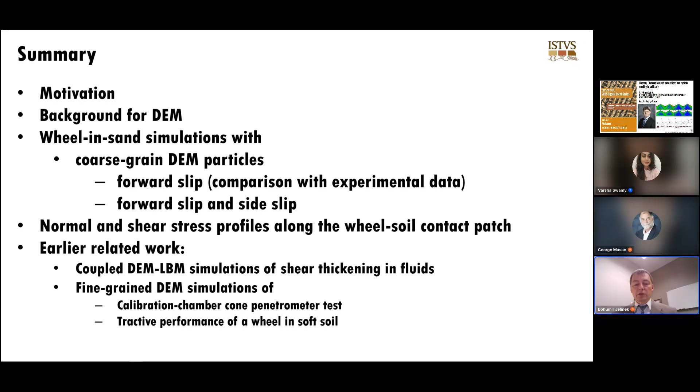Accurately predicting wheel performance in granular media is essential for evaluating off-road mobility in agriculture, construction, space exploration, and defense applications. Empirical relationships require resource-demanding experiments, and their validity is limited to the slip and speed ranges at which the measurement was performed. Finite element models have a hard time dealing with large discontinuous deformation of soil, especially under high slips and aggressive maneuvering. The discrete element method, on the other side, aims to model wheel-soil interactions with higher fidelity.

However, for perfect physical representation, tracking every particle in fine-grained soil is computationally demanding. Therefore, DEM needs coarse-grained models. Stress profiles at the wheel-soil interface are sufficient to determine soil reaction to the wheel load. Therefore, the numerical representation is examined here.

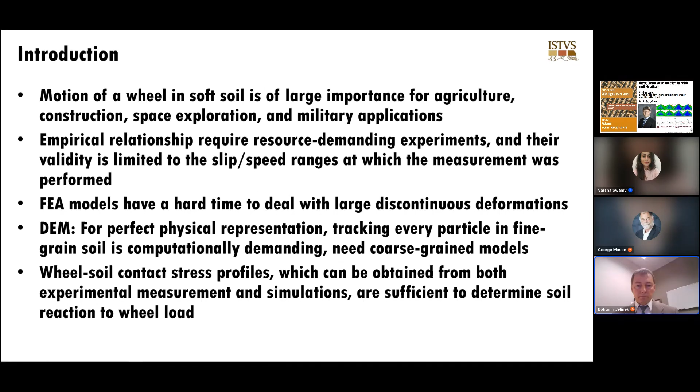In our recent coarse-grained DEM studies, we applied Hertz-Mindlin and Hertz-Mindlin with JKR models to represent DEM contact physics. Hertz-Mindlin is the default model used in Altair's EDEM software package due to its accurate and efficient force calculation. Note that Altair was recently purchased by Siemens.

In the contact model, the normal force is a function of normal overlap. E star is the equivalent Young's modulus, adjusted according to Poisson ratio of the materials in contact. R star is equivalent radius. Additionally, there is a damping force, FND, which is proportional to relative normal velocity. E is a coefficient of restitution. Beta will be used on the next page, and Hertz-Mindlin JKR model denotes a Hertz-Mindlin model with non-zero Johnson-Kendall-Roberts cohesion coefficient, which is further described in EDEM documentation.

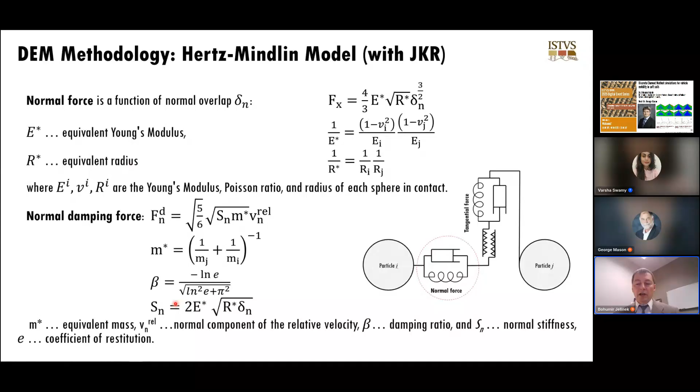The tangential force depends on the tangential stiffness and overlap, where G star is the equivalent shear modulus. Additionally, there is a tangential damping force proportional to relative tangential velocity, which is limited by Coulomb static friction.

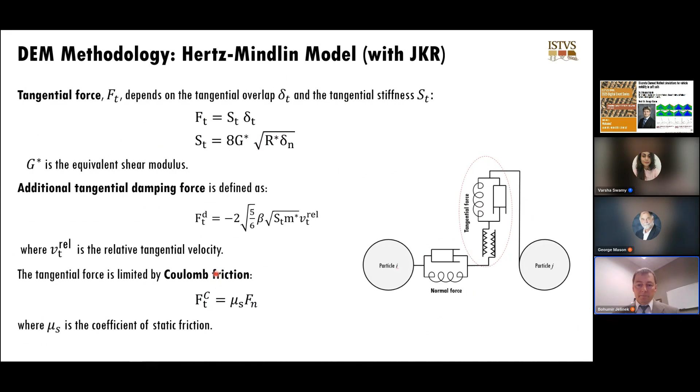The experimental reference for the present DEM simulations was a study titled Experimental Analysis of Tread Pattern Effects on Tire Tractive Performance on Sand, using an indoor traction measurement system with a forced slip mechanism, published by Shinone et al. in 2010, partly presented at the 16th International Conference of ISTVS in Turin in 2008.

Their study shows tread pattern effects on drawbar pull, gross tractive effort, running resistance, and sinkage. We compare with their smooth wheel results.

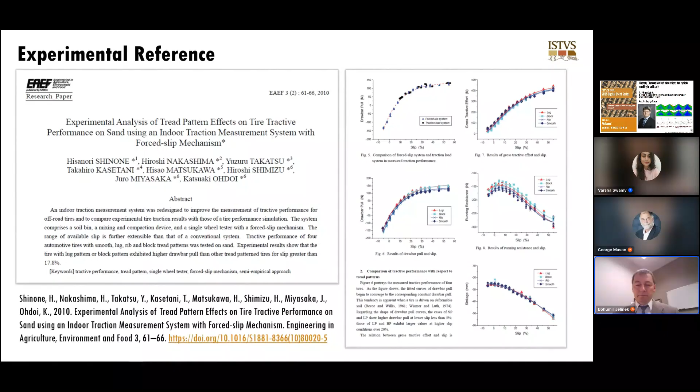The table shows the dimensions of the wheel and the particle bed. The figure on the left illustrates the triangular facets forming the smooth surface of the wheel, which has a diameter of 535 millimeters and a width of 170 millimeters. The figure on the bottom right shows facets for the particle bed, which was 3 meters long, half a meter wide, and 60 centimeters deep. 3 yellow spheres show a single DEM particle.

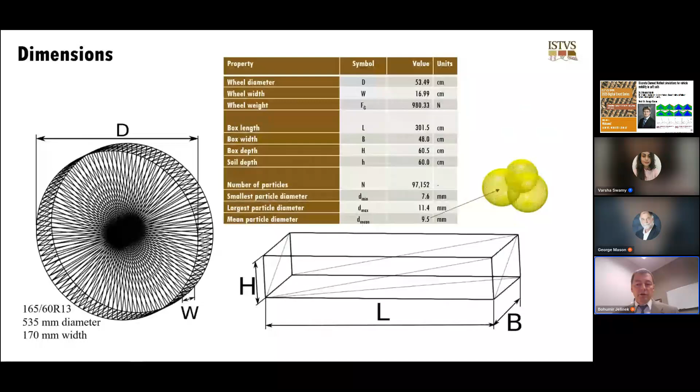A particle bed to simulate wheel-soil interactions was generated using the particle factory functionality of Altair's EDEM software. The particle bed was assembled from 5 identical material blocks, repeated along the longitudinal direction. To lower the simulation time needed to populate the bed with particles, only the particles in a single block were settled under periodic boundary conditions.

GEMM stands for Generic EDEM Material Model database, which is distributed along with Altair HyperWorks EDEM Discrete Element Method software package. The materials examined in the present work were selected using the Material Wizard by answering 3 questions.

First, the small application scale was chosen. It selects the smallest particle size available in the GEMM database, giving a mean particle diameter of 25 millimeters along the particle's widest dimension. Therefore, we are using a much larger mean particle size than dry sand to reduce the computational cost of the model. The 25 millimeter mean particle size is 5 times larger than the upper boundary for the particle size of coarse sand, which is defined as 4.75 millimeters by the cement concrete website.

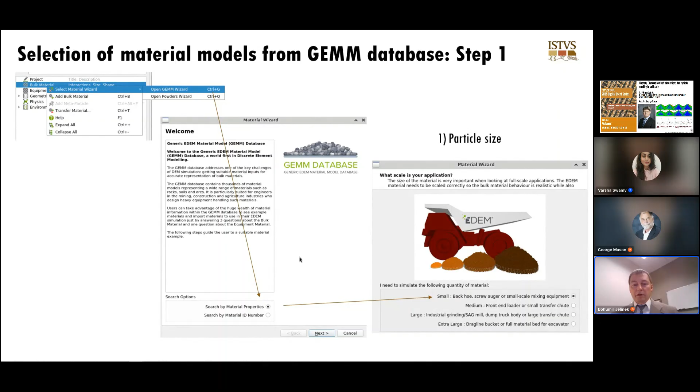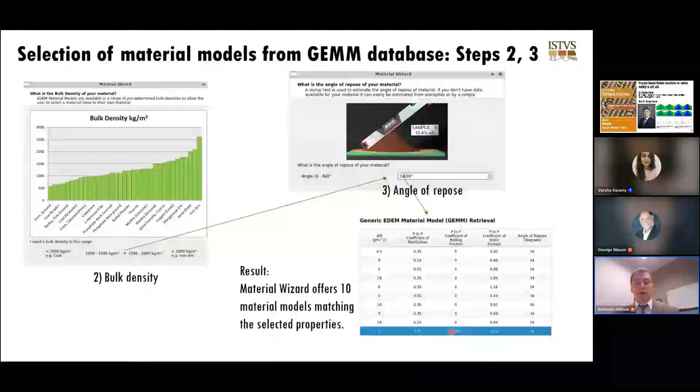The full list of DEM parameters for these 10 materials is shown next. Here, P indicates particle-only properties, PP indicates particle-particle interactions, and PG indicates particle-geometry interactions. The particle bed, meaning particle bed walls, and the wheel are considered geometries. There is a total of 10 material parameters.

4 of them vary among the selected materials. Those 4 are coefficient of restitution, coefficient of static friction, coefficient of rolling friction, which is non-zero only for material number 1636, and JKR surface energy. Non-zero JKR is used to represent cohesive materials.

Next, we describe the DEM simulation procedure. With a load of 980 newtons, corresponding to the load from the experimental reference, the wheel was placed minus 1.3 meters away from the center of the particle bed. By coupling a rigid wheel motion solver to EDEM, the wheel moved at a constant circumferential velocity of 97.6 millimeters per second to the final position of 1.3 meters.

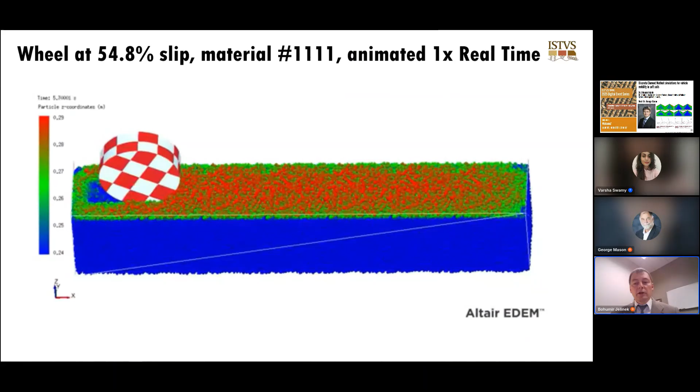This animation shows the wheel motion at 54.8% slip in material number 1111. 1 times real time means that both the animation and the actual wheel motion completed within approximately 58 seconds. The range between the blue and red boundaries is about 5 centimeters, corresponding to the sinkage or rut depth of approximately 5 centimeters.

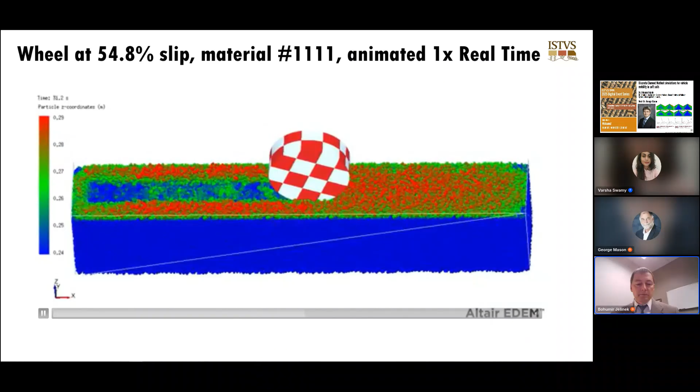What are the properties that are of interest from DEM simulations? First, the slip is defined as a ratio of axis rotation over overall rotation. This slip is either forced or is calculated from the simulation, depending on whether we are doing forced slip simulations or towed condition or self-propelled condition for the wheel.

Drawbar pull force, which is a horizontal force available to pull external load, is defined here. Then there is gross tractive effort, which is torque exerted by particles on the wheel divided by wheel radius. And there is motion resistance, which is the difference between these two.

The averages of these properties are calculated starting after the wheel and soil reach the steady state. The applied wheel slip ranged from minus 5.9% to 54.8% in both experiments and DEM simulations. Time evolution of sinkage, net traction, and gross traction are calculated and recorded at each time step.

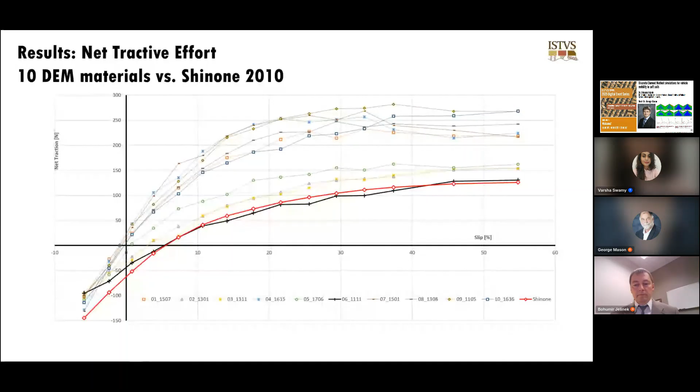The match is excellent for positive slips and slightly worse for negative slips. The gross tractive effort from the GEMM material number 1111, black, matched the measurement, which is shown in red, only for large positive slips. The best match to the measurement of the gross tractive effort was achieved by the material number 1311, which is the thick yellow curve.

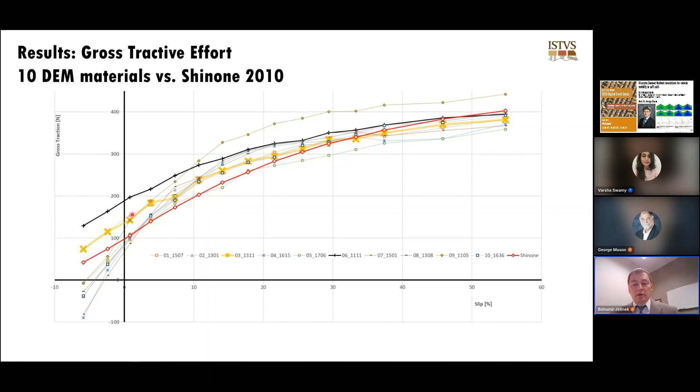Note that the results from material 1301, which is shown by the gray curve with triangles, are always very close to the results from the material 1311. These two DE materials differ only in the coefficient of restitution.

The best match to the sinkage measurement, shown in red, was achieved by the material number 1311, which is the thick yellow curve. Again, the yellow curve is very close to the gray curve. The next best match to the sinkage measurement was the thick black curve from the DE material number 1111.

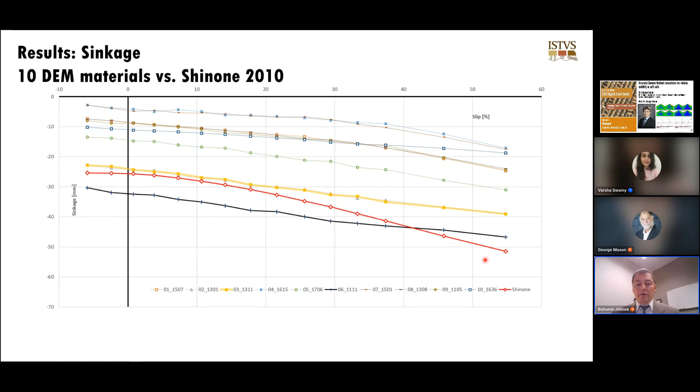This table shows R-square values, the coefficient of determination between the 10 DE materials and experiment. The values of R-square close to 1 means the match is closer. The best matches are shown in green.

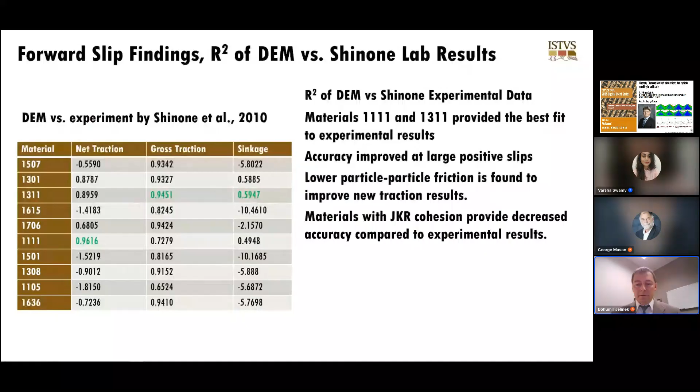The material 1311 matched the sinkage better than the material 1111 at lower slips. However, the material 1111 predicts sinkage more accurately at higher slips, very high positive slips.

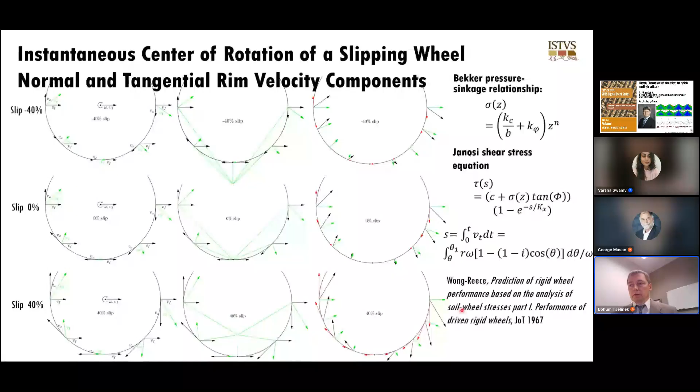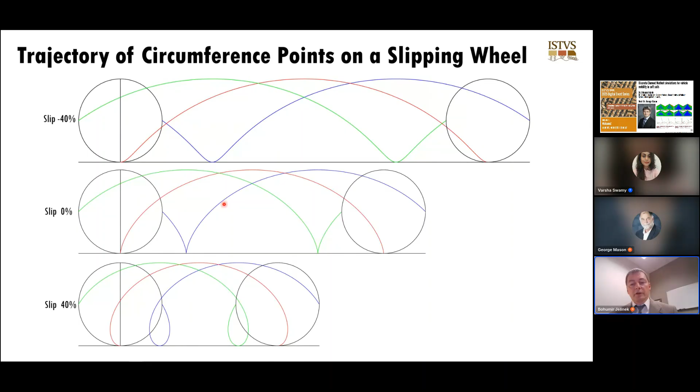In all the plots shown in this presentation, the wheel moves from left to right. Prescribed slip conditions are achieved by enforcing forward velocity and keeping the circumferential velocity of the wheel equal to 97.6 millimeters per second.

With prescribed slip, the wheel is only allowed to move freely in the vertical z direction. The towed condition is achieved by forcing Vx, the forward component of velocity, to the value of Vc, circumferential velocity, and by allowing one extra degree of freedom, free angular velocity omega y.

That means the wheel is towed with a speed of Vx equal to Vc. The self-propelling condition is achieved by prescribing circumferential velocity of 97.6 millimeters per second, and by allowing another extra degree of freedom, which is free horizontal velocity Vx. The slip can be calculated as an average over the steady state of the wheel-soil system.

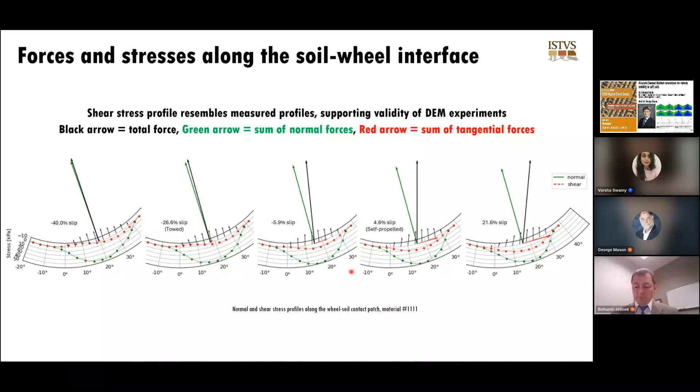Phi1 and Phi2 are the angles at which the wheel enters and exits the soil. The squared tilted sine approximation offers an alternative to connected halves of Gaussian distribution, used by Hiroko and Ishigami in the Journal of Terramechanics 2020. The shear stress profiles in the present plots resemble those measured by Hiroko and Ishigami.

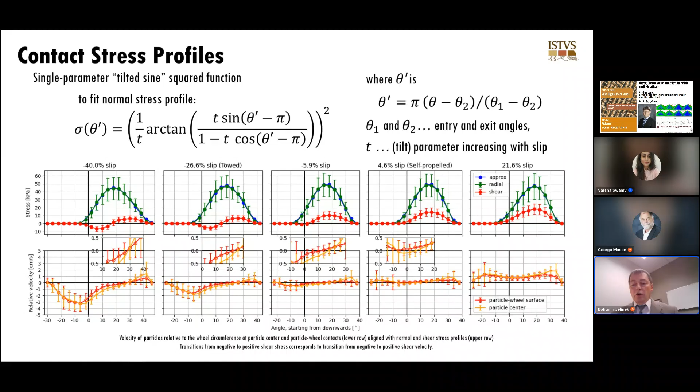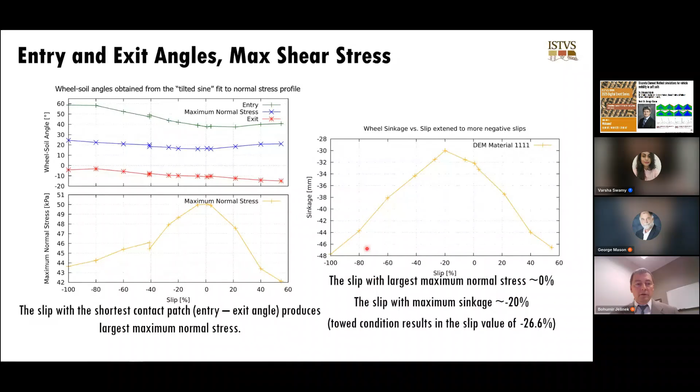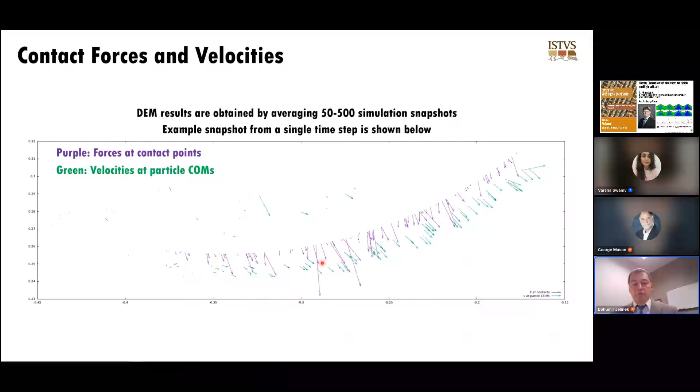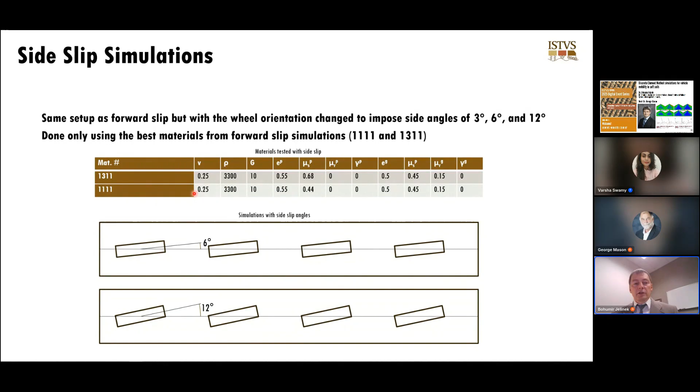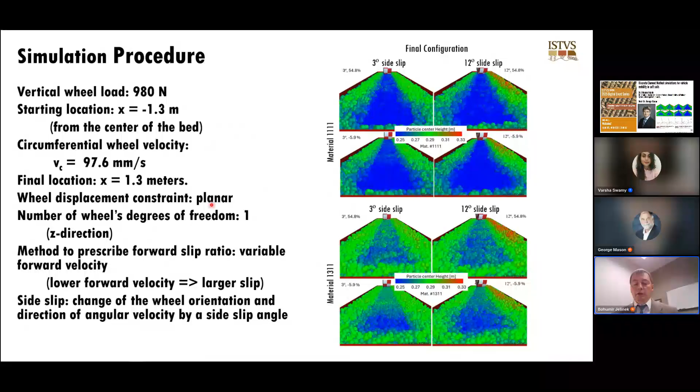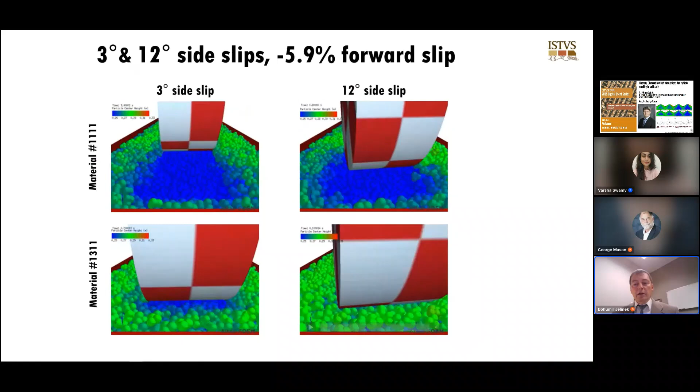Side slip simulations are similar to forward slip simulations, except that side slip is introduced by changing the wheel orientation. The angular velocity orientation was also changed in accord with the wheel orientation. These animations are also displayed at 1x real time, meaning both animation and measurement take about 25 seconds. The range between the blue and red colors, corresponding to 25 and 33 centimeters, is about 8 centimeters, resulting in a sinkage or rut depth of about 8 centimeters.

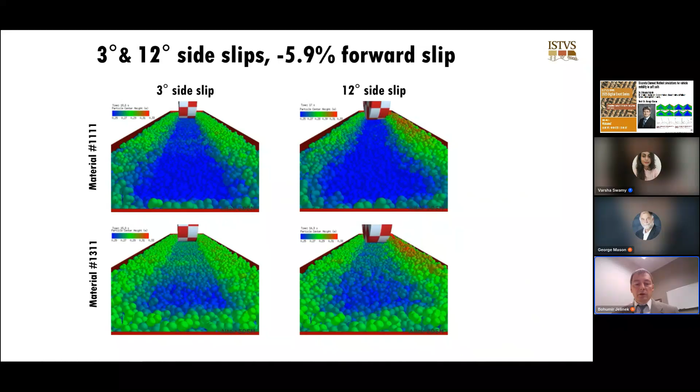Fx is the forward component of the resulting soil-wheel force, meaning pointing along the box longitudinal direction. The forward component of the drawbar pull, Fx, decreases with increasing side slip. Material 1111, with static friction lower than material 1311, produces less forward pull and more sinkage at each side slip.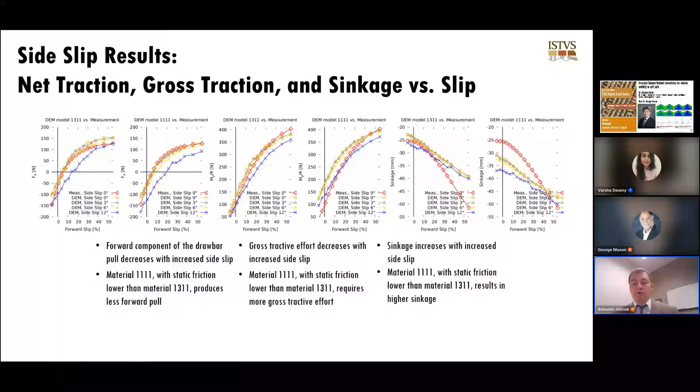The gross tractive effort, My/R, is lower for the lower friction material 1111, pointing out even higher losses when the wheel operates with higher sinkage. The most significant change in all three variables—forward pull, tractive effort, and sinkage—is seen when the side slip changes from 6 to 12 degrees, that is, between the yellow and blue lines.

These plots compare lateral force, shown as Fy, overturning moment, shown as Mx over r, and self-aligning moment, shown as Mz over r, between the two materials. The side slip force Fy increases with the side slip angle as expected. The same is true for the magnitude of the overturning torque Mx and the self-aligning moment Mz, with the self-aligning moment having much lower value than the overturning torque. A significant change is seen in all three variables even when side slip changes from 0 to 3 degrees.

In conclusion, the DEM study enabled detailed analysis of sinkage, traction forces, and lateral loads, revealing trends consistent with experimental data. By illustrating DEM strengths and limitations in capturing tire-soil interactions, this work aims to support its use as a powerful tool for advancing vehicle design and simulations.

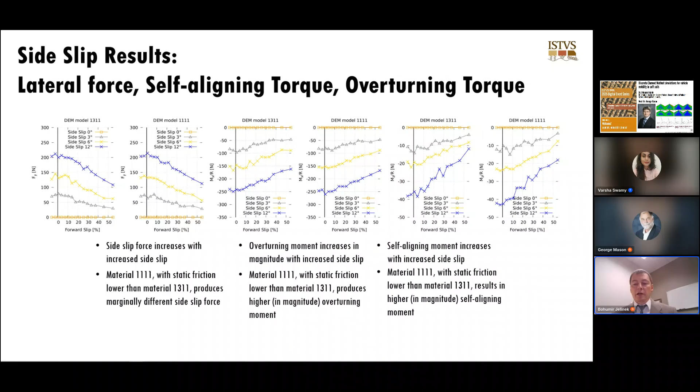Now I will briefly present our earlier discrete element method related work.

These are snapshots from coupled DEM lattice-Boltzmann simulations of particle suspensions in fluids. The top left animation is from 2D simulations of the drafting-kissing-tumbling phenomena, also showing fluid flow patterns. The animation in the center left shows fluid flow patterns and the forces exerted by fluid on particles. The snapshots on the bottom left show particle suspension in fluid settling under gravity.

The right side plot shows the work by Daniel Johnson, published in the Journal of Rheology in 2017, simulating shear thickening of particle suspension in fluid, reproducing experimental results for a parallel plate rheometer.

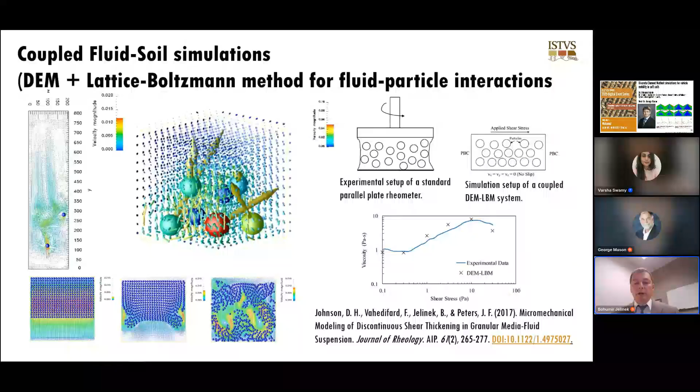These figures show results from a fine-grained DEM study of mobility cone penetrometer performed at the Center for Advanced Vehicular Systems, published in 2019 in the ASCE Journal of Geotechnical and Geoenvironmental Engineering. Close to realistic simulations were produced, including effects of stress field and soil density.

The effect of confining pressure was tested by applying a vertical surcharge load at the top of the specimen.

DEM simulations allow calculation of the stress in soil based on interparticle and particle geometry contact forces. The animation on the right shows the time evolution of radial stress during a calibration chamber cone penetrometer test. Snapshots in the upper right show the stress ellipsoid in the RZ plane, indicating both principal stress ratio and principal axis rotation.

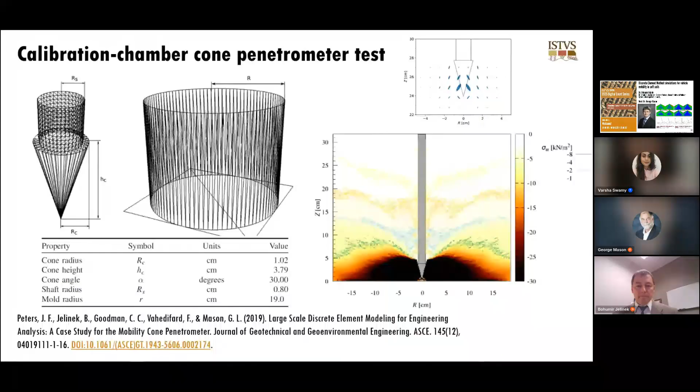The equation on the left shows how the stress is calculated using DEM contact forces. The plots in the upper row show laterally averaged contours of vertical stress under the wheel. The plots in the lower row show laterally averaged contours of shear stress.

The braked -20% slip condition is shown in the first column, the towed condition in the second column, and the powered 20% slip condition in the right column. The plot in the lower row shows a familiar butterfly pattern of the shear stress.

These calculations are results of a fine-grained DEM study of tractive performance of a wheel in soft soil that was presented at the 2021 ISTVS conference.

The upper figure shows lateral variation of vertical stress under the wheel in braked -20% slip, towed, and powered 20% slip conditions, in kilopascals. Front view of the wheel is shown. These values are from a lateral section passing through the wheel axis of rotation, inclined 10 degrees forward from the downward direction.

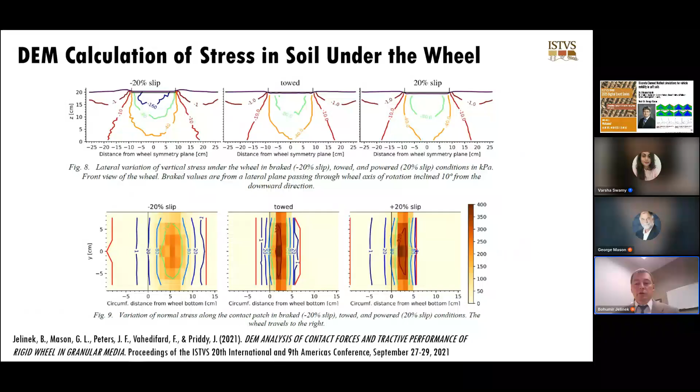The lower figure shows variation of normal stress along the contact patch in braked minus 20% slip, towed, and powered 20% slip conditions. The wheel travels in the left to right direction. An increase in the maximum value of normal stress for the narrow contact patch was observed, similarly to what was seen earlier. The contact patch length tends to increase for negative slips, as indicated in the earlier plots as well.

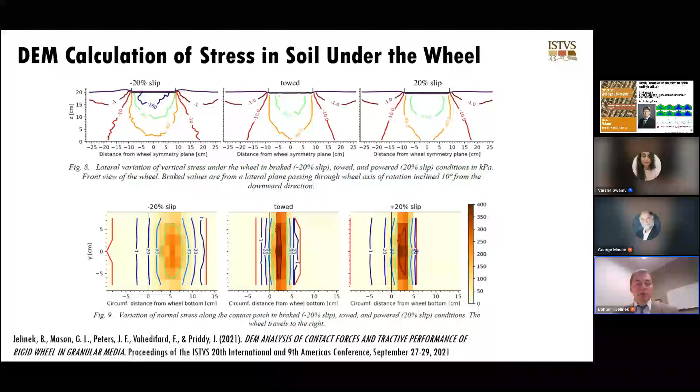In the recent study, we examined tractive performance from 10 materials from Altair's generic EDEM material model database, matching macroscopic properties of dry sand. GEMM material number 1111 provided the best agreement with laboratory measurements reported by Shinone et al. 2010. Net traction was the most accurate model, except that slightly lower values occurred at negative slips.

Sinkage was overestimated by up to 25% for slips lower than 40%, and underestimated by up to 10% for slips higher than 40%. The gross traction agrees well with experimental results for slips larger than 40%, while at lower positive and negative slips, the gross traction is overestimated by up to 200% at low slips of minus 5.9%.

Thank you for your attention.

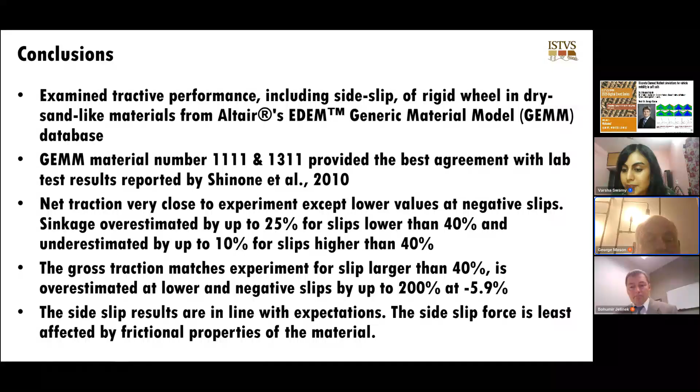Very good question. So there is really a lot of noise in this data, and that is mainly due to particles being large and contact appearing quite suddenly, disturbing the wheel motion.

Now, all that we were doing is averaging. The measurement was performed every 0.1 seconds. So we ended up averaging the values of torque, forces, and sinkage from about 50 to 500 snapshots of the simulations, to make sure that we were already in the steady state—okay, I will return to that later.

So we started averaging, I believe, 9 seconds after the wheel was dropped into the soil box, and we ended averaging a good distance before the final wall. So we assume that from those values we can have a pretty good average that is not affected by initial or final discrepancies due to the wheel not being settled or steady state between wheel and soil not being reached.

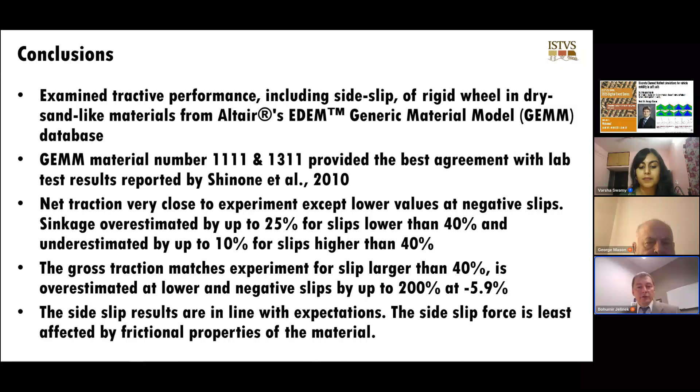So let me—right, the slip in this work is calculated as excess rotation over... oh, I forgot the acknowledgement. I'm so sorry. Okay.

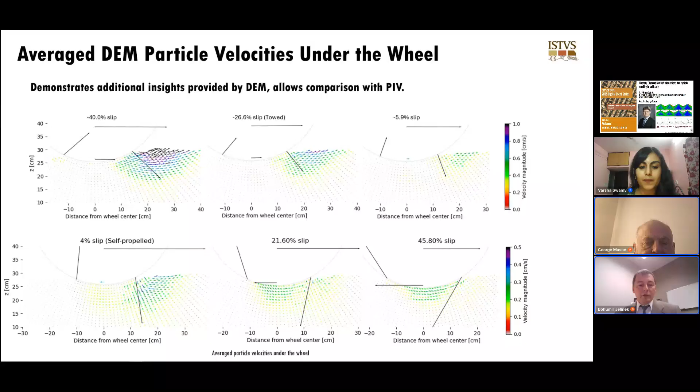I don't mean to put you on the spot, but ISTVS has a definition for slip, and we don't all adhere to it. In this case, the slip is calculated as excess rotation of the wheel surface—excess meaning angular rotation minus forward velocity, divided by total rotation. In this case, the maximum slip that can be achieved for a forward moving wheel is 100%.

So I believe we have values of 58 or so. Now, if we want 200% slip, the wheel would have to rotate forward and move backwards—that's the way we would achieve that. But we did not do that; we did not rotate forward while moving backward.

Here, I also wanted to show, starting from 7 seconds, maybe up to 50 or so depending on the distance from the end wall, the averages were calculated, and we assume that the wheel state in that interval is fairly steady.

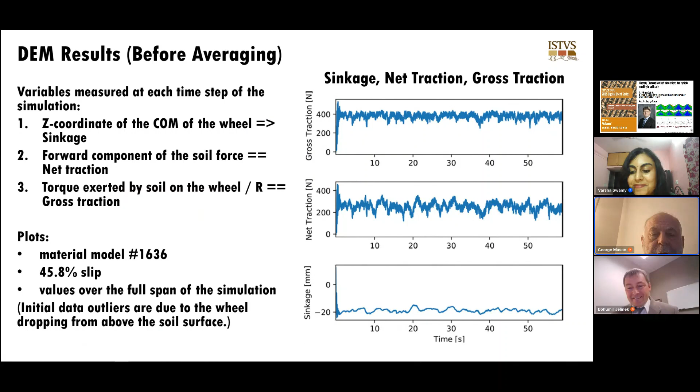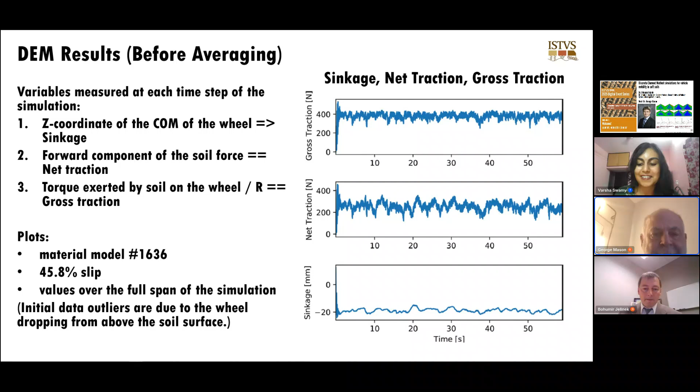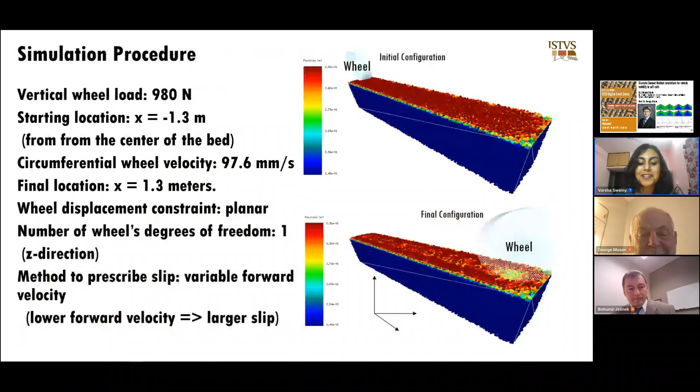Somebody mentioned that slip, especially at zero, is not well understood, and that's a correct statement. I agree 100% with that. Varsha, were you going to say something? Oh no, I was just going to say yes, we could hear you, Dr. Jelinek, don't worry about that. But yeah, I do agree with that statement. Which statement? With the slip, especially at zero, that it's not very well understood. Different people have different definitions, and sometimes it gets to me too. Yes, we're on the same page.

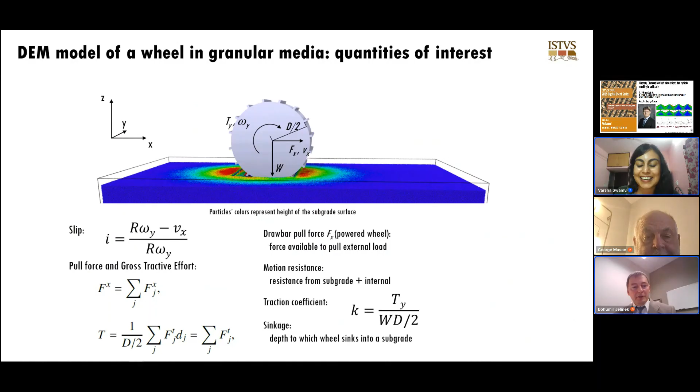So ambiguity may arise from how do you define wheel diameter, whether it's usually there is effective rolling diameter. Right, yeah, that's also one more thing. I recently went down that rabbit hole because I was seeing different papers and how they were defining their slips. Yeah, maybe that's a good target for the tire modeling community, workshop, or group. Yeah, look at different definitions. Yeah, I agree.

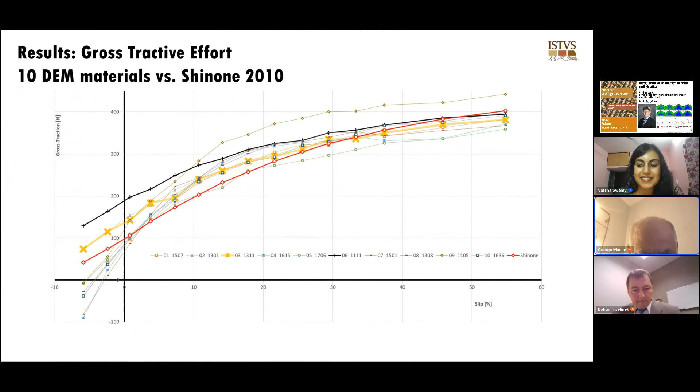Well, okay, I don't see any more questions. I see somebody typing in. It looks like there's somebody typing in one comment. Varsha, do you want to close out? Yep. Okay, so slip is poorly defined at zero omega. That was the comment I was seeing getting typed in. That's right. When you have zero in the denominator, then there is a problem.

So we are only looking at the wheel that rotates at least a little bit. ISTVS, I think, defines one for positive slip, another one for negative slip, where they flip the numerator and the denominator. I think positive is one minus V by R omega, and for negative it's one minus R omega by V. So we probably avoid that. So that bounds everything by plus or minus 100%. That's true, but I don't think beyond that there's a good rationale.

So the idea of other definitions, I would agree that they need to be included. And I think everything's a function of time increments. And so if you change that definition when you get down to very high resolution, you might have to come up with new methods of computation, or at least different types of equations. And at zero slip, the fun just begins if you're trying to figure out if there's actually net traction or gross traction at zero slip. Everybody has an opinion there. Yeah, I agree.